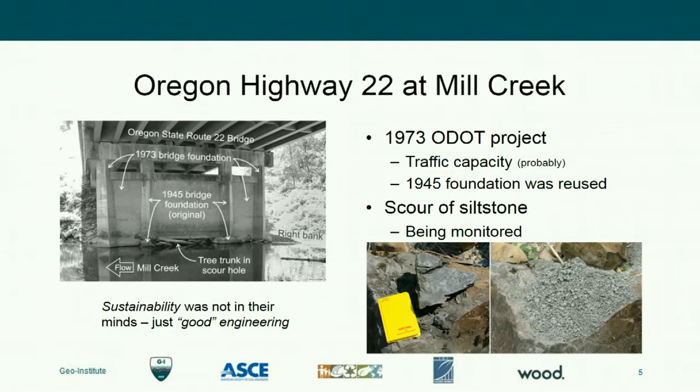So here's the checklist - very tiny words, I'm not going to comment on much of these things. Let me make a quick shift here on my own screen. So this is providing effective leadership and a decision to make something sustainable, even though it wasn't called that at the time it was done. Nonetheless, it definitely falls under that category in the ENVISION rating system.

Mexico City has a very interesting geologic condition that results in consolidation of soft clays as groundwater resources lower the groundwater level, and that is a problem. The soft clays create a problem not only for building support, which requires piles as a common foundation type, but the groundwater decline is causing subsidence. The problem with a combination of groundwater-induced subsidence and pile-founded buildings is the potential for the ground level of the building to become elevated relative to the ground, which creates all kinds of challenges for utility connections and entries.

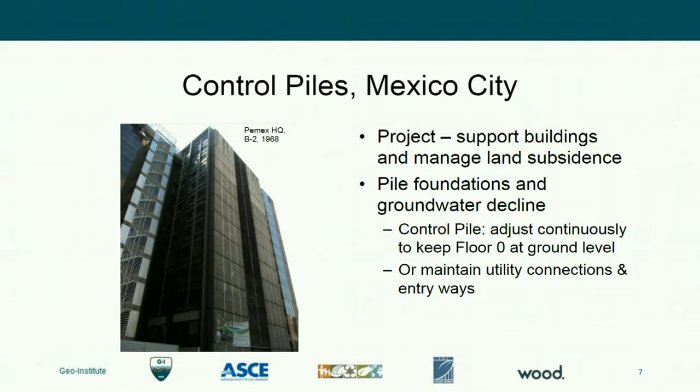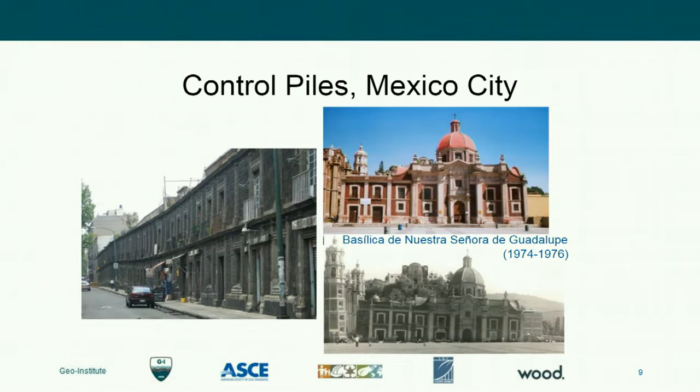So here's a building on the left, apartments it looks like, maybe retail at the bottom, and the Basilica de Nuestra Senora de Guadalupe on the right. That was constructed 1974 to 1976, a very heavy building with shallow foundations. You can see the subsidence, which was corrected, and I'm not sure how it was done, but maybe Hayward Baker, one of our sponsors, may have been involved in correcting that problem. So you can see the challenges.

Unfortunately, this confined space was not treated exactly the way it needed to be, and a conflagration occurred because somebody struck a match to light a cigarette. That's the reason I'm able to get the photo that I was, because of that damage to the building, which is very sad. In fact, it had some fatalities.

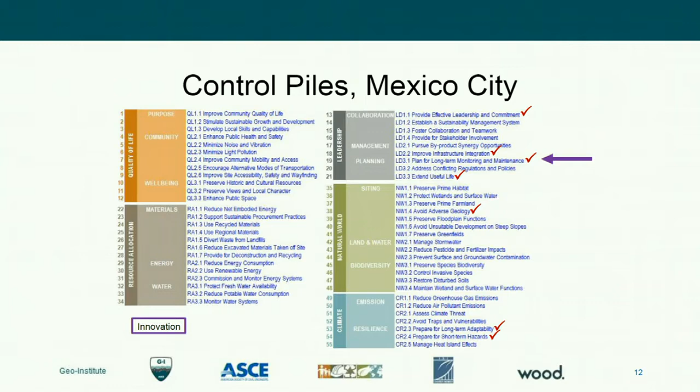But the idea that a crew had a continuous task to adjust these piles to keep the ground level of the building at the ground surface. So the control pile then, what I've picked out here is a plan for long-term monitoring and maintenance that's built in to allow the structure to exist in the geologic setting they had to deal with at that location.

Okay, so we'll change gears and look at a few other smaller projects that have some complexities to them.

What that meant was that rock bolts, face plates and shotcrete were not allowed to be used because of the impact they would have on the visual appearance. The slope could not be laid back, and I'm not sure if that was entirely to preserve the appearance or in part because of right-of-way, which is certainly a potential problem.

So Schnabel Engineering was the lead engineer on this, and they proposed, tested, and were able to successfully use polyurethane grout with drain holes, because that's impervious. The polyurethane was essentially a cement that glued the rock blocks together. They had to have the drain holes so they wouldn't have hydrostatic pressure behind it. That was a very useful approach - in fact, unique, the first attempt to make that happen.

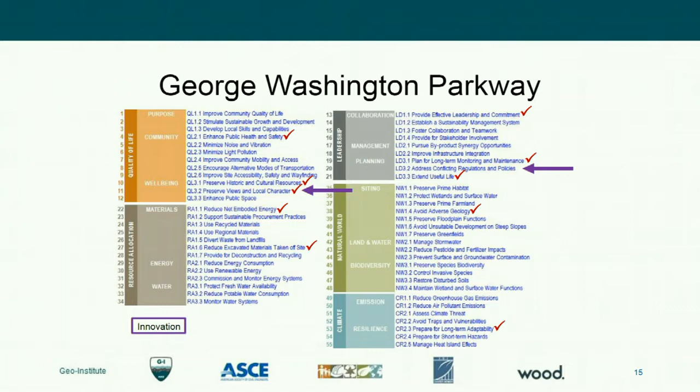The one I've picked here is to address conflicting regulations and policies - the policy to maintain the visual appearance while stabilizing something that was a safety hazard.

The next one here is a fault investigation at a school site in Los Angeles. The project was to locate the traces. The school site had been in existence for many years before the fault hazard was recognized, in a dense urban setting with lots of buried utilities.

Trench exposures is the preferred way of evaluating these fault traces, but in the dense urban area that's not possible in many cases, so we were using closely spaced hollow stem auger borings and some geophysics. The hollow stem augers use no water for mixing mud - it's not needed for that technology. It generates no liquid waste other than the groundwater after that's been encountered, and it has a large diameter barrel, which gives us a good view of the geology in the subsurface.

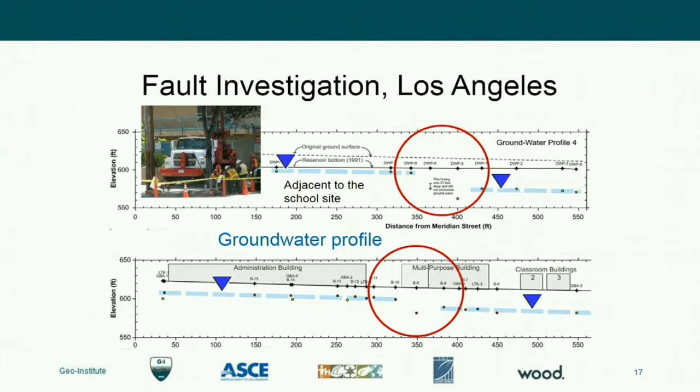So here you see a diagram where the groundwater was detected, and faults in many settings generate or create groundwater barriers, which is a clue as to where they are. We used that along with the stratigraphy, which you can see here, and identified where the fault traces were relative to the buildings on the site.

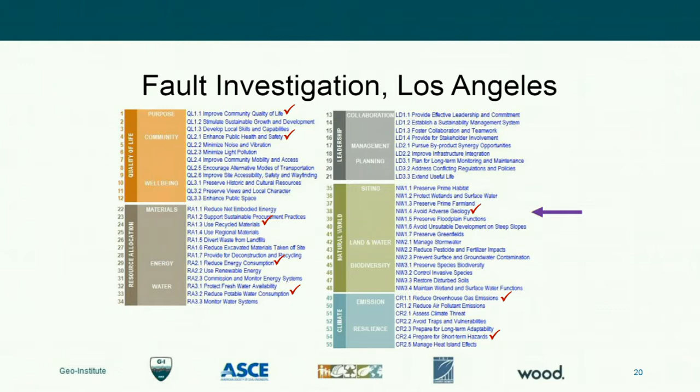And there's some geophysics. In view of time, we used seismic refraction from the ground surface and supplemented it with boreholes. We also had a trench where that was possible. So for this one, we'll pick avoid adverse geology, and of course we weren't avoiding it, but we were recognizing it and factoring it into the civil engineering project.

Lower Mount Wilson Road is a private road. It was originally built in the 1800s to provide access to some timber resources at what turns out to be the head of a very large landslide. A resort hotel was built there in the 1800s. It burned down, as many historic buildings of that era were prone to do. It was taken over by the county of Los Angeles, and the area up there was very well suited to be a lookout location for fire hazard management.

So the road was used by hikers, but the only vehicles that went on that road were LA County vehicles, so very low traffic. Average daily traffic was like 4 vehicles. It was maintained by the fire crews with their own equipment.

A major storm occurred in 2005 that created a couple of locations where the fire department crews were not able to do their normal maintenance to keep the road open, basically a single lane unsurfaced road. I have a note here that a fiber optics line runs along this road all the way up to Mount Wilson, which is hugely important for communication, from the community of Pasadena up to Mount Wilson, or maybe down from Mount Wilson.

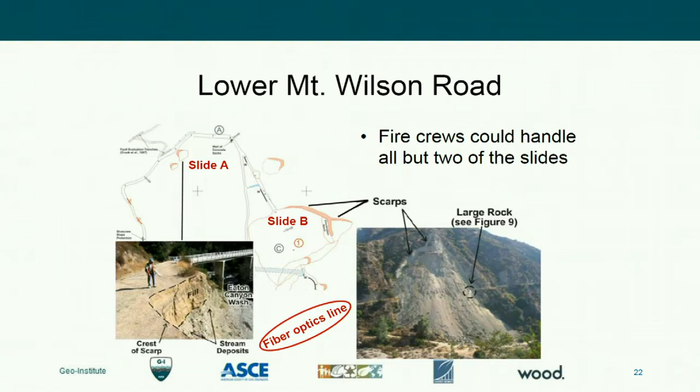So we decided to do a fix of the road, restore vehicle passage, and we did that with a combination of gabion baskets, which you see here at the same site, with a welded wire steep slope system above it. And on the major landslide right here, we had a welded wire wall with some gabion baskets above that wall to hold the toe from raveling.

Some very interesting things about this would take a long time to describe, but this was an innovation of using baskets between a natural rock outcrop and a huge boulder that was part of the slide, probably there before the road was established originally.

But this was a county project, and if this had been a public works project, we would have had to have factors of safety and those sorts of things. I rationalized and proposed that we disregard the stability, because this was a private road, one lane, unsurfaced, used only by the fire department, and reestablishing road access would be easy or possible to do. It wasn't exactly easy, but it was straightforward. If we needed to do an investigation for a stability analysis to get a permit like a normal highway would require, this road would have been abandoned because of the cost of the investigation, let alone the stability analysis itself, which probably was not possible.

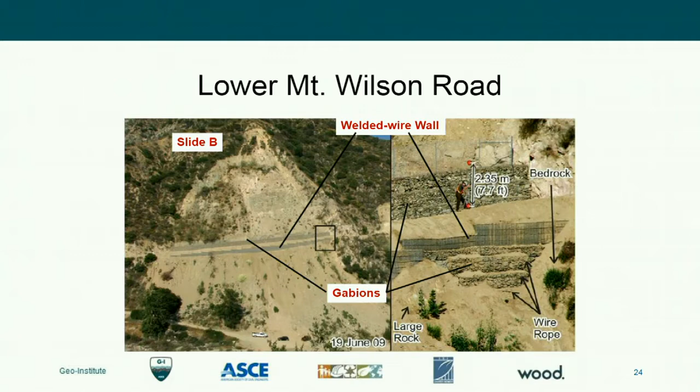So this is conflicting regulations again, as we mentioned before, to address those conflicting regulations, and many other things too. There's a paper in the ICE, the British Engineering Sustainability Journal, about this.

In Western Australia, the town of Perth has a building that was originally constructed in 2005, eight stories on a mat foundation, and there was a hole for a future building that had just been left in that shape. New owners bought the 2005 building, and in 2008 wanted to raise the height, creating a tower, which needed deep foundations.

Now, this has won several awards. It's called the Condor Tower. If you're interested, you should be able to find this information online, which is where I got this.

So here on the left you see the original Oakleigh building, mat foundation, 8 stories, and then the 2008 Condor Tower, where the tower part needed pile foundations. Those piles were installed through the frame of the existing building. They did no demo of the structure, well, they demoed walls, but they did not demo the structure.

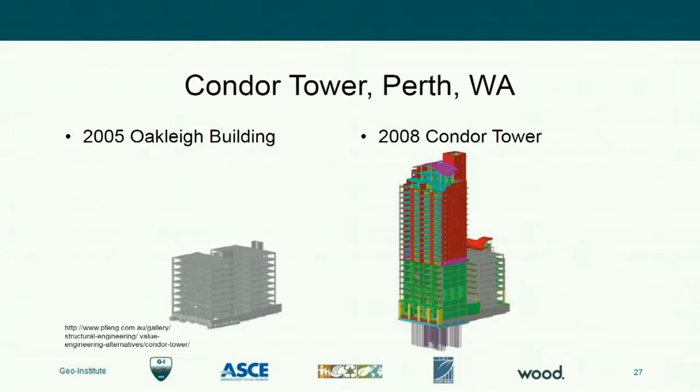So that was really quite interesting, and that's certainly leadership and commitment to be able to do that. There's lots of engineering to make that happen, but the idea that it could happen, I thought, was really excellent for geotechnical sustainability.

And then I've got a series of slides here. This is Cape Hatteras Lighthouse, which was actually moved about 2,900 feet because of erosion related in part to sea level rise, no doubt about it, but also wearing away of the beach, maybe even without appreciable sea level rise just because of large storms.

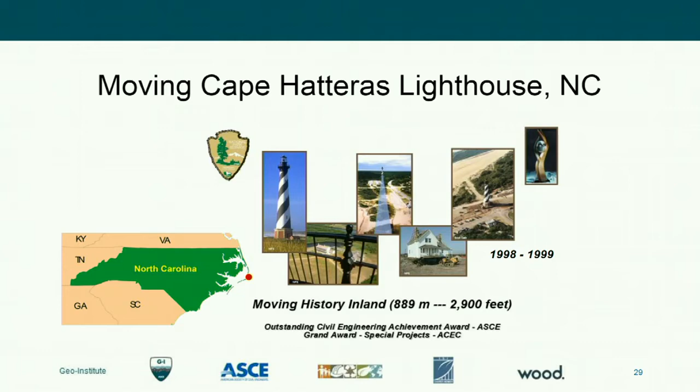What was done to move it had a geotechnical component. It also had a non-geotechnical component in terms of the jacks to keep it level, and rollers to allow it to be pushed hydraulically, in a stepwise manner, very much like some ancient Roman type constructions. The lower part was a steel mat, with evaluation of the foundation conditions in beach sand and near shore deposits.

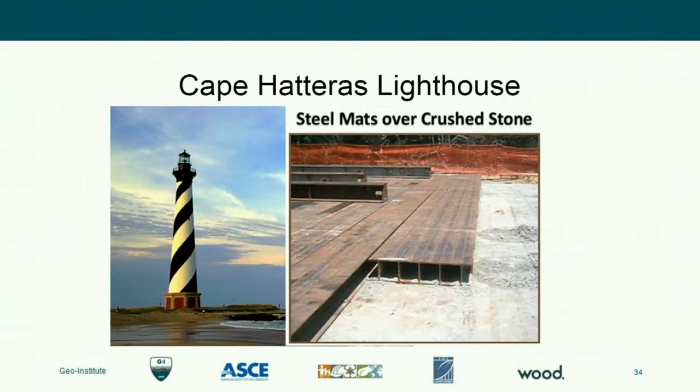So down below, you see what that looks like. Here's the steel mat with the guides. It went about 2,900 feet, or 889 meters.

A series of investigation holes were done in part by Law Engineering, that became MACTEC, and then subsequently AMEC, and now a wood company. Soil borings were also made by the Army Corps of Engineers, who were overseeing this. So this was quite an undertaking, very high risk, high profile.

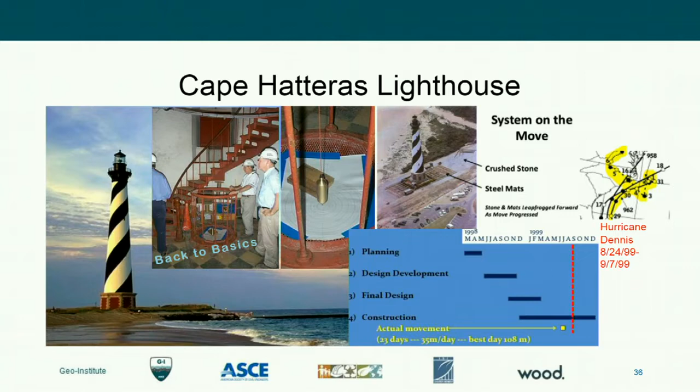Here's a pendulum with a circular target, because the tilting of this rigid, brittle structure was really critical. And while it happened, a hurricane occurred. Hurricane Dennis moved across the site, and that's the yellow track there, with the black track with yellow highlight showing the hurricane path. From 1999, there were a number of hurricanes. That one happened during construction, where the red vertical line is.

So this has a number of really interesting things, but again, I picked the leadership and commitment one to highlight here.

And now the use of underground space. This is in Lalibela, Ethiopia, up approximately in the area of Amhara. I visited this area for a water supply project, but not Lalibela itself. That was a tourist attraction that I visited.

King Lalibela wanted to create some churches that would serve as a monastery, for well, I'll just leave it at that. I won't go into more of the history, although it's kind of rich. But this was done in the 12th century.

The problem or condition here was that durable stones and timber for typical construction were not available here. So the geologic environment included a volcanic conglomerate, called agglomerate, that was soft enough to be excavated with hand tools, but strong enough to stand vertically.

So a series of churches, this is the Church of St. George, which is cruciform in plan view, and one of the most iconic of the 11 churches here. It's 3 stories high, and the rooms were created by hollowing out the earth material, the rock, to create those rooms. It's really fascinating and very impressive.

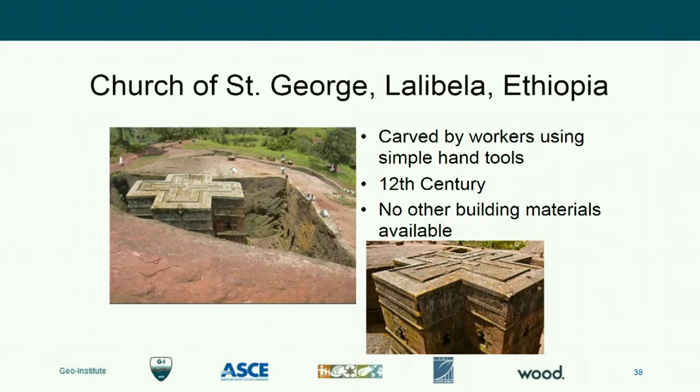So here, what did I pick? Conflicting regulations and policies. I don't know why I picked that one, so I will just skip that. Probably in the wrong place.

Extend the useful life, because it's been in operation since the 12th century.

And finally here, the idea that purple is the new green, because recycled water, at least here in Southern California, is designated to be in purple colored pipes and facilities.

So the point here is that this is suitable water to use for drilling fluid makeup for sure, lab testing perhaps if we want to use water for concrete mix, if that's going to be suitable, or soil conditioning for compaction, or dust control.

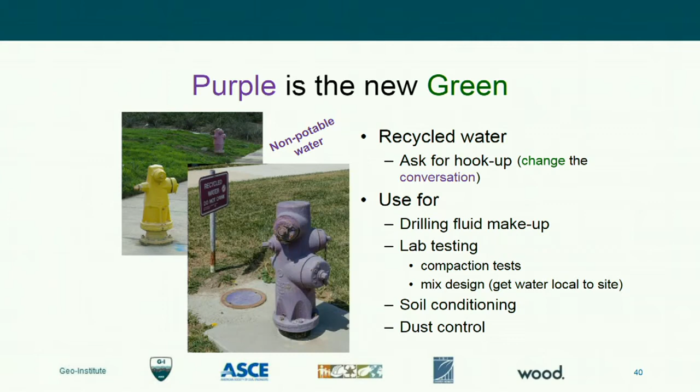So I would encourage us all to ask for hookups with recycled water on our projects. If they're available, that's wonderful. If they're not available, simply asking for it will raise the profile of awareness on the people that need to know about that, or we would like to know about that. And that's leadership. There's many other things, but lots of leadership opportunities here.

So I think I've used up the allotted time, and let me go to Q&A and see if there's anything in there.

One of the topics that is real common, and I mentioned this in the first example, the bridge in Oregon, is that much of what is called sustainability, certainly in geotechnical, is what we would consider to be just good engineering, balancing cut and fills and that sort of thing.

So what's wrong with just calling things good engineering and having sustainability be part of it? And that's a good concept, and it ought to be happening. But I think the issue we ought to consider is that we have a word, sustainability, that means so many different things to different people that it would be really helpful for it to be connected to us.

And civil engineers, most if not all of the people on this webinar will recognize, have a triple bottom line philosophy of the economy, the environment, and society.

One of the reasons we wanted to do it in California was San Diego, which worked out well since the annual temperature is roughly 65 degrees Fahrenheit. It doesn't change that much, so at least we had that as a baseline. It rains roughly 12 inches in a year in San Diego.

So 3 main objectives from this work: definitely understand some of the in-situ thermal properties. There's been a lot of literature published, so we just wanted to verify if we were going to get the same data. Then understand what is the potential for heat extraction at a municipal landfill, and also start putting a framework together to understand if, based on the heat extraction potential, we could predict what kind of heat you can get and for how much duration.

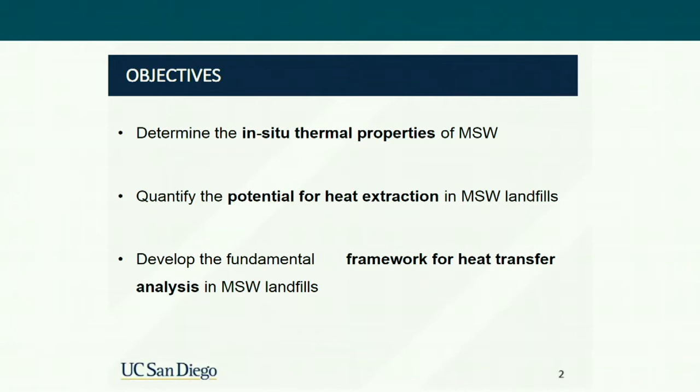Just a quick summary of what the landfill liner system looked like. Our heat exchange pipes were sitting on top of a protective cover, generally select waste, about 2 feet thick, which sits on top of a 1-foot drainage layer. The liner system consisted of a geomembrane, a geosynthetic clay liner, and another geomembrane at the very bottom.

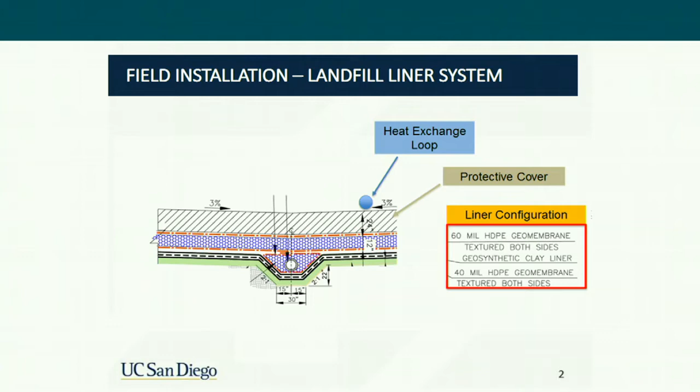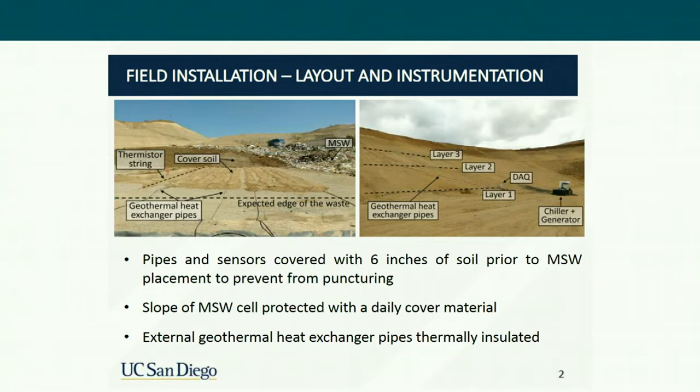So that's just giving you a close-up look of the same. You have layer 1 of geothermal pipes sitting right at the bottom of the liner system, layer 2 at 20 feet high, and layer 3 at 40 feet high. Then you see the black wires, which are your geothermal pipes coming out of the landfill.

Just an instrumentation layout in terms of cross-section. Again, the same picture, but you see another 120 feet of pipe. We have 4 sensors: blue is closest to the edge, then green, yellow, and a dark green shade. So roughly 12 sensors, 4 per layer.

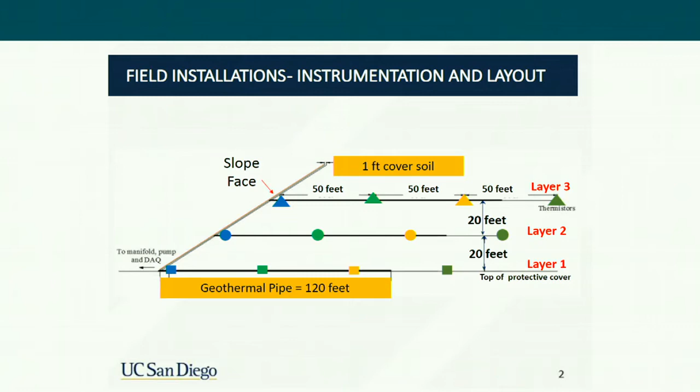The idea was you would be circulating water, running it through a chiller, so basically it sends it to like 50 degrees Fahrenheit, pushes it through the loop. Once it goes through the loop and comes out on the other end, you'll see how the water temperature changes once it's made its way through the pipe.

So we divided this project into 2 stages. The first stage was just to understand how long it takes for temperature to stabilize within the landfill. We put these pipes and temperature sensors in and monitored temperature within the landfill for a year. Roughly at 13 months is when we saw the temperature stabilize, with no further increase in temperature within the landfill.

In the second stage, once the temperature was stabilized and we understood there was no more change, we implemented our heat extraction system, wherein we pushed cold water at one side of the loop and measured it coming out on the other side. We ran this experiment for 17 days, and our target temperature was 12 degrees centigrade, or 50 degrees Fahrenheit plus or minus.

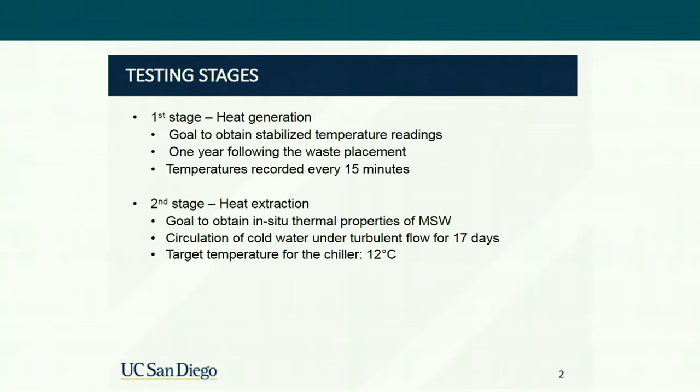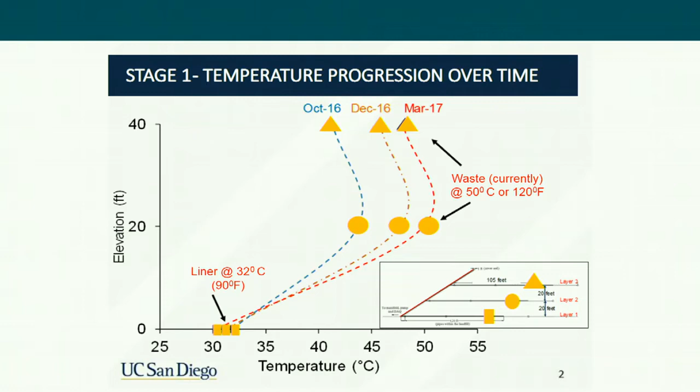In the second phase, once we established there was a stable temperature within the landfill, this graph shows on the left temperature, and on the right side the volumetric flow of water. The gray line corresponds to the volumetric flow, which is where we try to push a constant amount of water within layer 2. On the bottom we have time in hours, where 400 corresponds to roughly 17 days.

The blue line shows the water going in at 20 degrees Celsius, and the water coming out, shown in orange, is 35 degrees Celsius, plus or minus. Based on that, Leticia in her dissertation has talked about the line analysis and heat analysis, and has come up with the waste characteristics, the thermal properties of the waste, about 1.3 watts per meter centigrade.

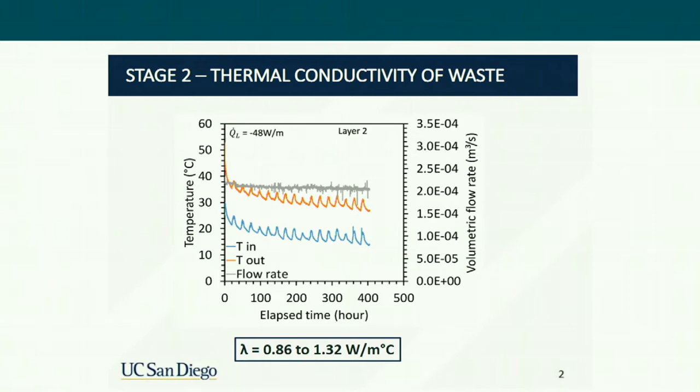In summary, at this very early stage of the project, we were able to install a geothermal heat exchanger system within a municipal solid waste landfill. We roughly saw 50 degrees Celsius in less than a year, which showed us there was potential to extract heat. Based on this preliminary data analysis, we see the average in-situ thermal conductivity is roughly 1 watt per meter centigrade.

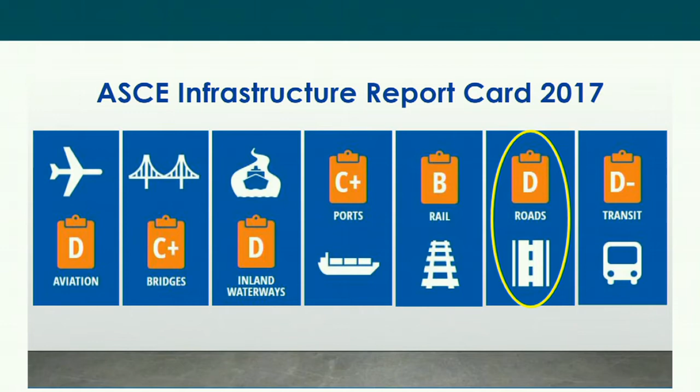As you know, pavement infrastructure is an important component of the built environment. They connect supply chains, enable trades and businesses, provide access to healthcare and education. There are several challenges such as industrialization, aging, natural hazards, etc., affecting the pavement industry.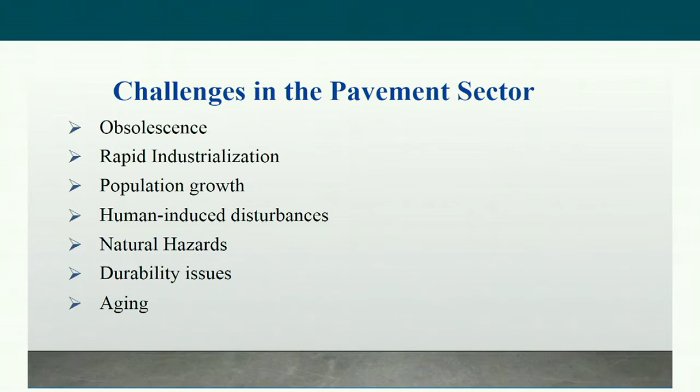One of the earliest definitions of sustainability was given by the Brundtland Commission. What this definition essentially means is development that is sustainable in the long run, and by the way, we can use the terms sustainability and sustainable development interchangeably.

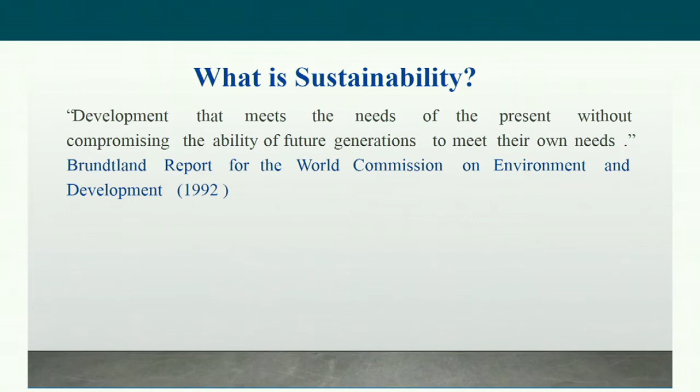Sustainability is maintaining equilibrium among the environment, economy, and society. Sorry, there's an issue with one of the animations. In September 2015, I believe, the member nations of the United Nations adopted these

17 Sustainable Development Goals, which should be achieved by each nation by the year 2030. Please note Goal 11, which focuses on sustainable and resilient infrastructure.

Researchers suggest that the scope of sustainability is highest at the beginning or planning stages and decreases drastically as the project moves toward the implementation stage. Therefore, it is necessary to incorporate principles or best practices concerning sustainability and resilience at the initial stages or at the conception of a project.

Now let's talk a bit about resilience. The conceptual definition states resilience is the ability of communities to withstand shocks or perturbations to their infrastructure and to recover from those effects.

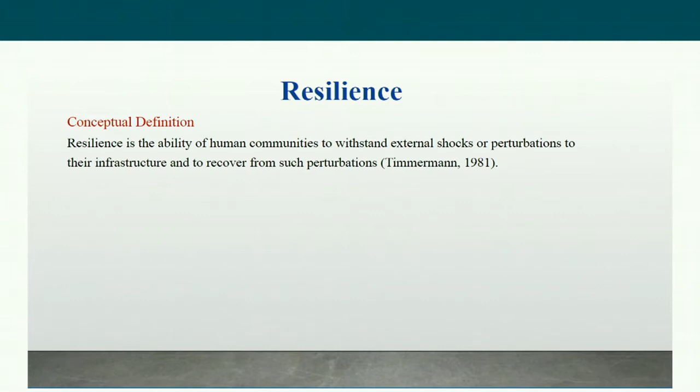Resilience is characterized by four properties - and I apologize, the font in this figure is a bit skewed. The four properties are robustness, or the capacity to withstand a certain level of stress without functional damage; redundancy, or the extent to which an infrastructure component is substitutable in the event of damage; resourcefulness, or the ability to identify disruptions and set up mechanisms to address the same; and rapidity, with which external disturbances are addressed and the losses are contained.

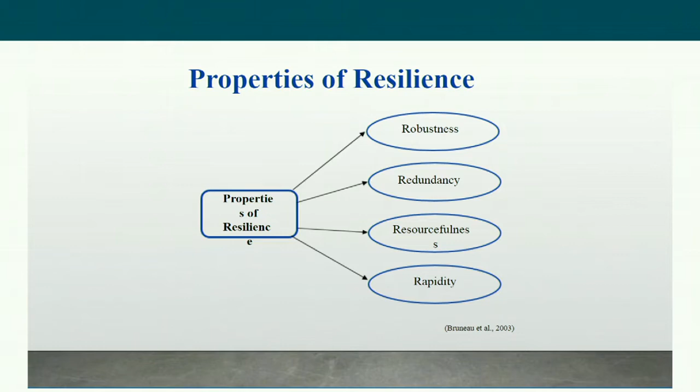To summarize, a combined consideration of resilience and sustainability is indicative of the quality of an infrastructure.

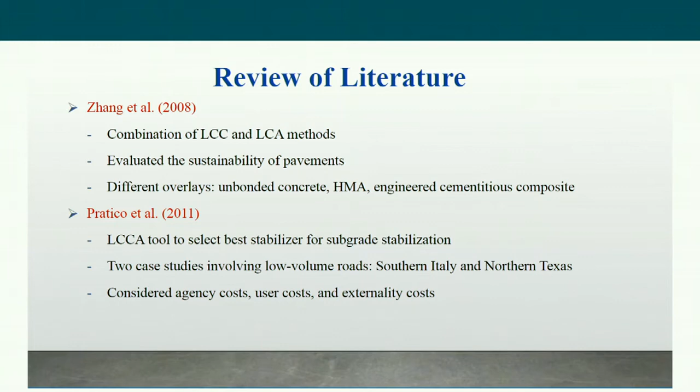The next few slides list out some past studies on sustainability in pavement infrastructure. We're not going to go through them in detail due to time constraints, so let me skip a couple of slides.

Now, most of the past studies highlight sustainability, but they do not adopt a combined or unified approach linking sustainability with resilience, and that is something we tried to attempt through this framework.

There were three major objectives: one, identification of metrics for sustainability and resilience; two, development of a quantitative framework; and three, defining the quality of infrastructure, taking into account both aspects of sustainability and resilience.

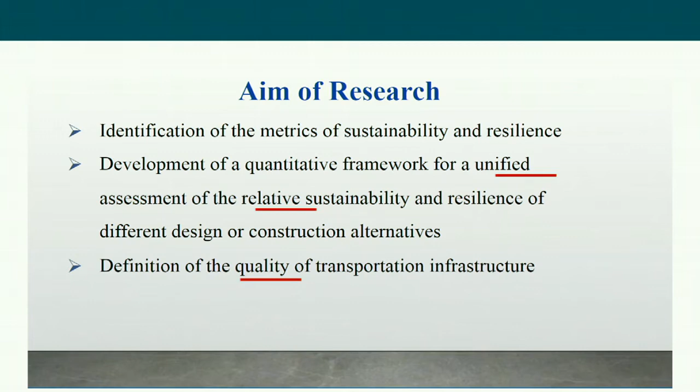Please note that the framework I'm about to introduce does not provide an absolute value for sustainability or resilience. It merely facilitates comparison or assessment of the relative sustainability and resilience of different competing alternatives.

So when I say alternatives, for a particular project, whether you want to use piles or drilled shafts, or a segmental MSE wall, a Gabion wall versus a gravity wall or a CIP wall. So when you have a bunch of alternatives, we can use this framework to gauge or assess the sustainability and resilience of these different competing alternatives to come up with a suitable choice.

Now let's dive into the framework conception. This flowchart explains the framework a bit more clearly. This approach is simple. It involves normalization and weighting - weighting as in attaching weights to the different impact categories based on their relative importance. We'll have an extensive discussion on the weights later on.

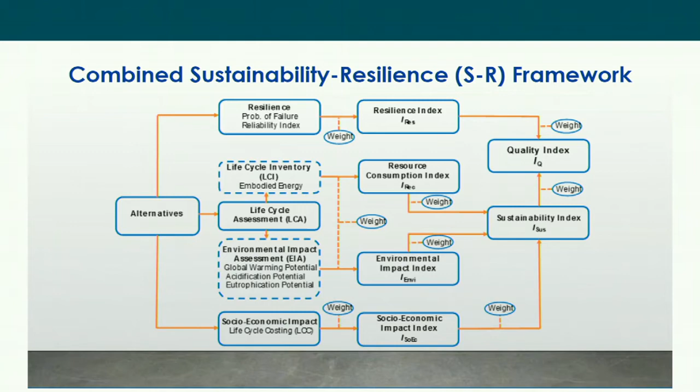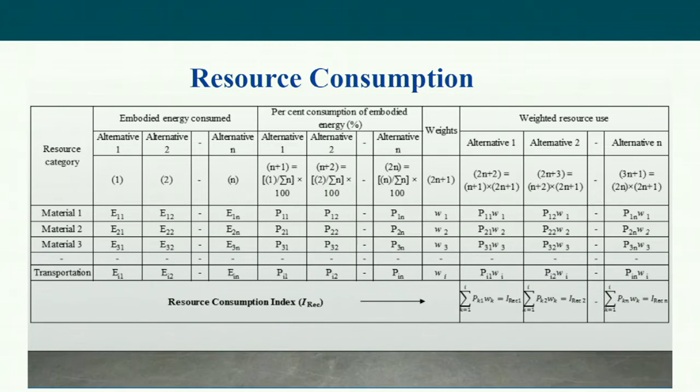So these are just the different metrics we talked about earlier. The life cycle inventory is performed based on the embodied energy. Let me just show you one of these. It's difficult, for time constraints, to go through all these tables, but let me just show you one quick table of how we come up with a calculation.

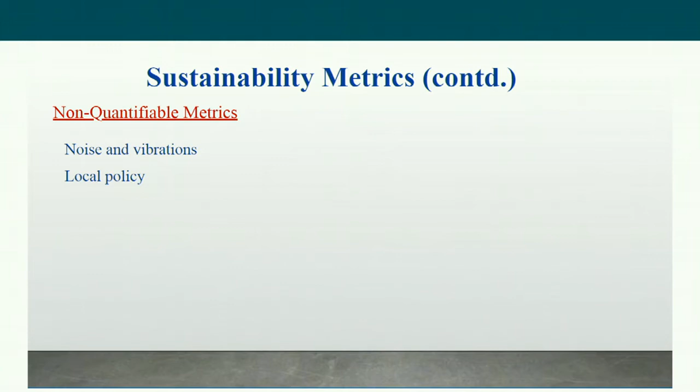Then we attach the weights, and finally we have our weighted impacts to give the environmental impact index, which is basically the summation of all the weighted impacts. So that's how the framework is developed. And the final aim or goal of the framework is to enable a visualization or a graphical tool.

So let me skip to - so at the end, we'll have something which looks like this. This is a radar chart representation. All these results, as you can see, have been internally normalized.

The beauty of this approach is that you can have any number of metrics for comparison purposes. In this polygon, we'll just add more nodes the more metrics you have.

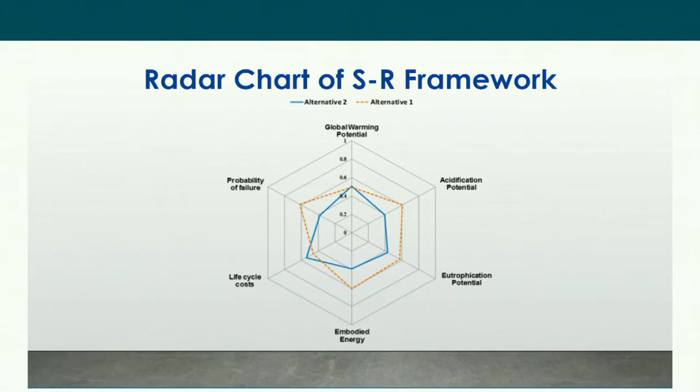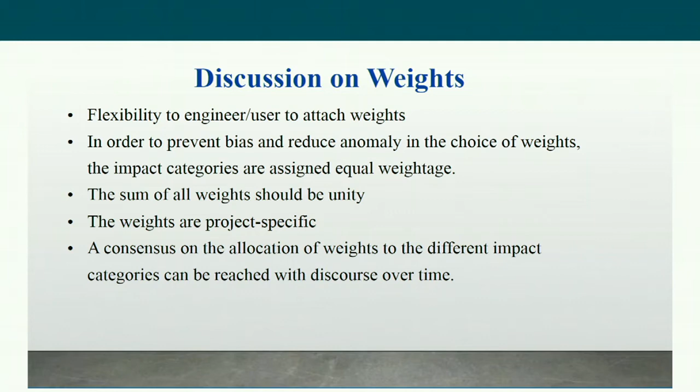Let me talk about the case study a bit. This is a subgrade stabilization project that we had, a research study supported by the Texas Department of Transportation, TxDOT, in Fannin County, Texas.

At the bottom right inset, you can see the test section. The annual average daily traffic on this highway was around 8,000, so this could be classified as a high volume road. The soils at the site are expansive clays that possess a high sulfate content.

Sulfate-induced heave was an issue, and we tried several combinations of lime and fly ash to stabilize the subgrade soils. Based on the lab studies, we decided to use 6% lime, and then we also decided to add some fly ash to limit the available calcium for ettringite formation so that we do not have sulfate-induced heave.

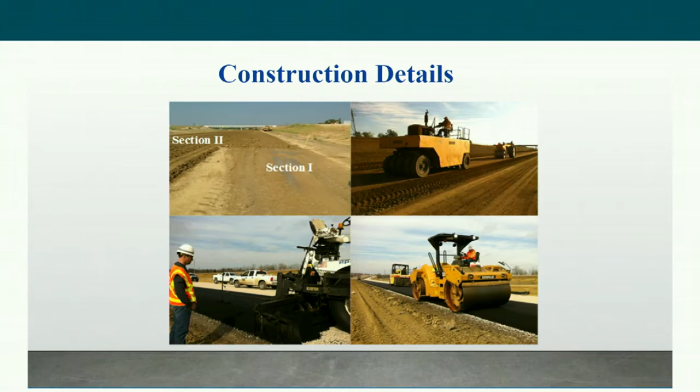So we came up with two test sections. Section 1 had 6% lime and 3% fly ash. Section 2 had 6% lime. This is the construction details. Both these sections included 7 days of mellowing, and both were also monitored continuously for a period of 2 years.

These are some of the assumptions for this case study. We had the section dimensions, we calculated the mass of the soil that was to be treated, the mass of the material. We assumed the mileage of the dump truck and the capacity, and the average distance. So we need these data in order to perform the assessment.

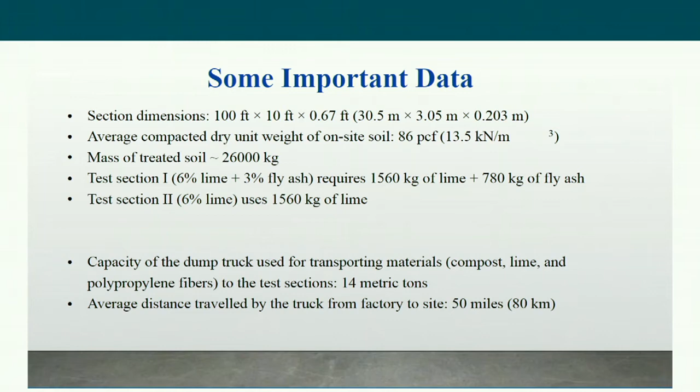The next few tables are just the assessment framework, I already showed these. Let me just finally show you the result.

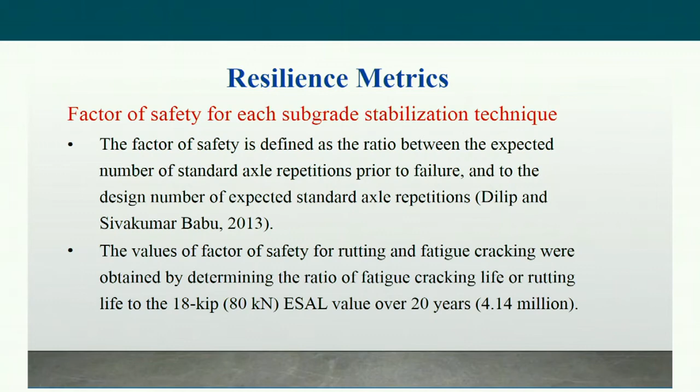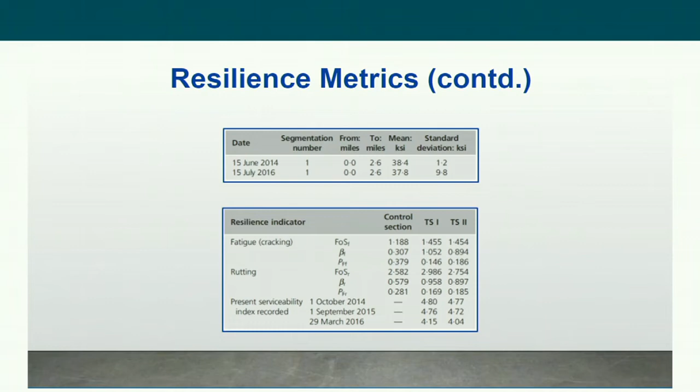For resilience, I think I just touched upon it a bit earlier. We used the probability of fatigue cracking and probability of rutting failure, and we also combined them with field readings. We had the readings for the modulus which we had from a portable falling weight deflectometer test, and we also recorded the present serviceability indices. Based on that, we found our resilience index.

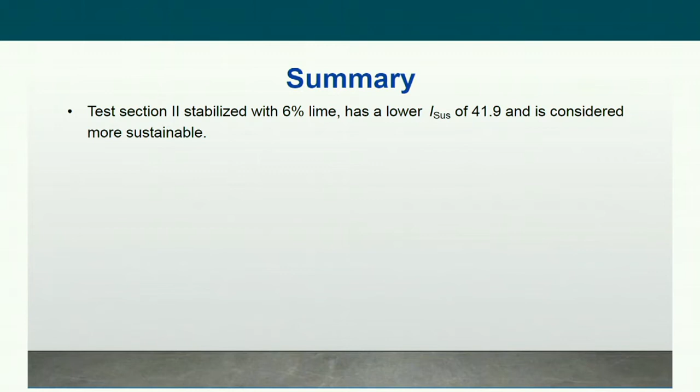In conclusion, as I mentioned, the framework facilitates a unified assessment of sustainability and resilience.

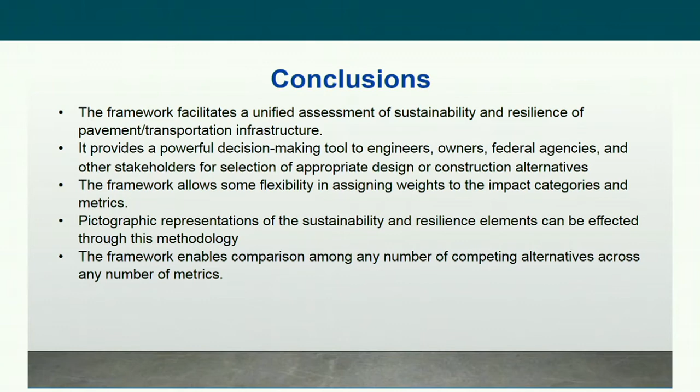It provides powerful decision-making tools to engineers and other stakeholders for selection of appropriate alternatives. It allows some flexibility in assigning weights to the impact categories and metrics. And finally, and more importantly, we have a pictographic representation of all the elements, so it enables comparison among any number of competing alternatives, among any number of metrics.

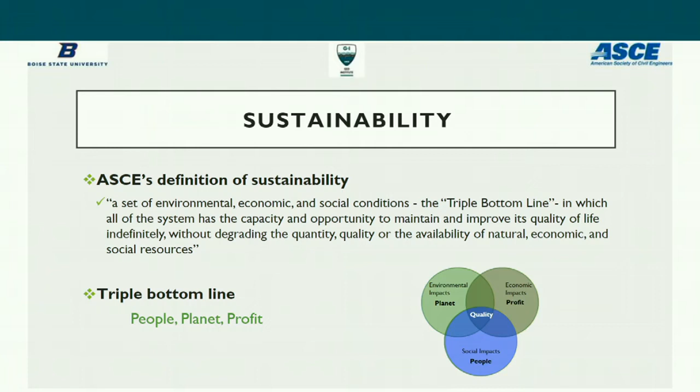So sustainability is triple bottom line: people, planet, profit. That's what we all have agreed upon. And then resiliency is primarily defined from these 4 R's: the robustness, resourcefulness, rapidity, and redundancy.

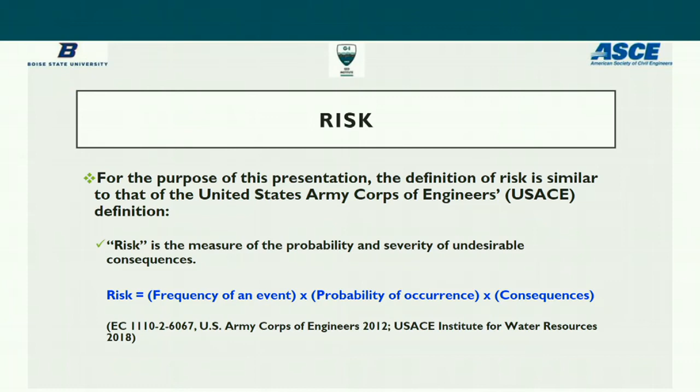And then the risk is, we are defining the risk as per the Army Corps of Engineers definition, which is risk is a measure of the probability and the severity of undesirable consequences. So risk is not only just the probability of occurrence, but what is the consequence of that, and what is the frequency of the event. So all these three make it a high risk situation or a low risk situation. We account for all these three when we talk about risk in our analysis.

So what should this framework look like? A good framework would measure sustainability and resiliency of its infrastructure while accounting for risk as well. And then the framework should be adaptive for various types of inputs or parameters that need to be accounted for.

for that particular infrastructure. Sometimes the analysis has to be very deep, accounting for every possible parameter. Sometimes the analysis needs to be very superficial because the decision makers are not really too much into the depth of these assessments. So the framework should be able to accommodate both the depth versus the breadth of these parameters.

And then some way to plot this or visualize the sustainability and resiliency indices in such a way that it's easier for the decision makers to see and understand where one alternative is falling compared to the others.

And then, our goal is basically to make it simple yet robust so that it is usable by practitioners. If it is too complicated, practitioners probably will have resistance to using it. But at the same time, if it is too simple and not robust enough to predict the sustainability and resiliency index accurately, again, nobody's really going to use it. So our goal is to be cognizant of both these aspects of the framework.

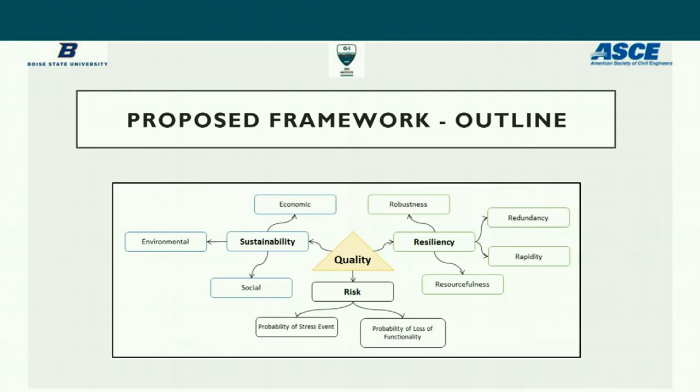So we are trying to account for all three of these and come up with index values that can be plotted, so we can see how the infrastructure is faring—whether it's high sustainable and low resilient, or the other way around, or good in both sustainability and resilience.

So the next few slides I'm going to quickly show how the framework steps work, and then follow that up with an example for an earthen dam. The basic steps for the framework are to first choose the system of analysis, whatever system you would like to analyze.

Then do a sustainability analysis with the triple bottom line as the basis—accounting for the economy, environment, and societal impacts for that infrastructure due to its construction. Then we report that sustainability in terms of a dollar per year amount, because we are looking at it from a life cycle cost analysis point of view.

Our idea is to account for each of these—sustainability and resiliency—especially when it comes to sustainability's societal, economic, and environmental impacts. If measured in metrics other than dollar amount, it's sometimes hard to visualize their impact. So we try to convert everything into a dollar per year amount so we can relate to them more quickly than, say, carbon emissions versus some metric for societal impact. So after doing the sustainability analysis, we report the results as a dollar per year figure.

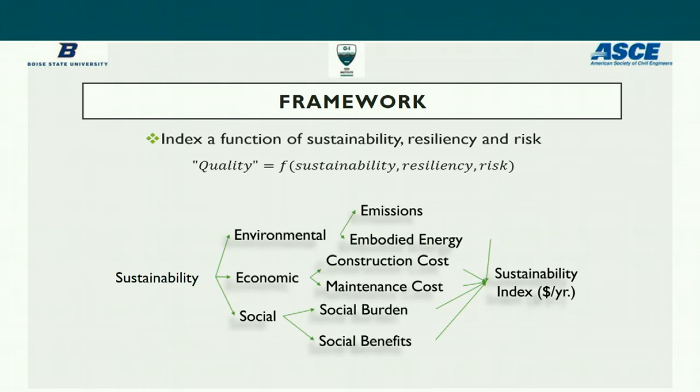And all of these will be combined into a dollar per year amount, and that's what we are assigning as the sustainability index.

And then for the resiliency, we start with the probabilistic hazard analysis. So what are the possible hazards that this infrastructure can be subjected to? And due to that, the first thing that will be assessed is the robustness. How robust is it under that hazard? And once the robustness is assessed, the change in functionality can be assigned based on how robust the system is.

Based on that, we can have a robustness index, and then we have to talk about the rehabilitation efforts. The rehabilitation efforts are the ones that will lead to the resourcefulness, rapidity, redundancy, and the hazard-related sustainability. Resourcefulness is how effective, how close are the materials that we need. It can be talked about in terms of the materials point of view, the budget point of view, and various aspects of being resourceful.

Rapidity, as the name indicates, is how fast we can get the infrastructure back in place. Redundancy is whether there is any alternative infrastructure to replace this as a short-term alternative or not. And then hazard-related sustainability is what it would take to make this infrastructure back to its full functionality, or some portion of its functionality.

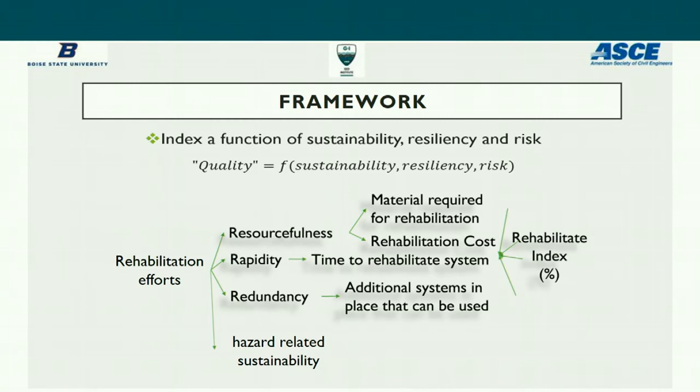So all this resourcefulness is material required for rehabilitation costs. Rapidity is the time to rehabilitate, and additional systems in place can be used for redundancy. All these will give us a rehabilitate index, and then the hazard-related sustainability has been normalized to the original sustainability numbers that we first did in the first step, and they yield a scaled R value, which results in some of the resiliency aspect of the index.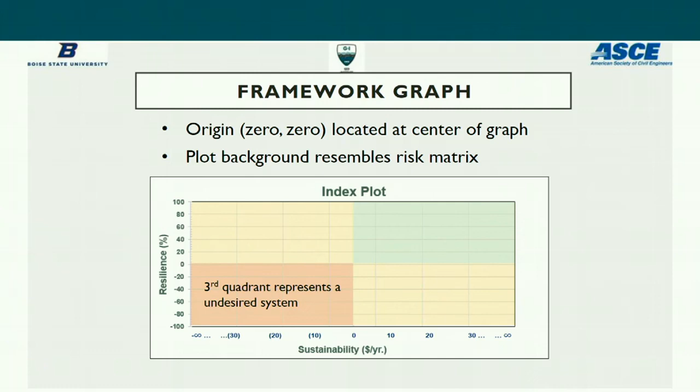If it falls under any of these two, second or fourth quadrant, the ones in yellow, they are quadrants that represent some caution. They are either very good in resilience or very high in sustainability. And then we have the third quadrant, which is the most undesirable of the three, which is not really a desired system at all. So we need to be able to plot our infrastructure in one of these four quadrants.

Because this is a dam controlled by the Army Corps of Engineers, not all information is publicly available, so we had to make some assumptions about the internal geometry for this infrastructure. We also obtained historical data on the economic and societal impacts of the dam to account for how these triple bottom line aspects of sustainability can be assessed. I want to insist here that this is an example of how the framework can be used. There are things that we have considered and things that we have not considered during this analysis — I will point them out as we go along, but keep in mind this is a simplified example for using the framework.

So for the sustainability, the environmental impacts — we use the construction activities as the basis for the environmental impacts. So excavation is a part of it, transportation of the material, and compaction of the material. During construction, because this is an earthen dam, the process is fairly simple: we bring the material from the predetermined site, bring it on site, and then compact. So we used the time to complete the job and the fuel consumed for the energy and emission computations from Caterpillar Inc., because we assume those are the equipment that were used during its construction.

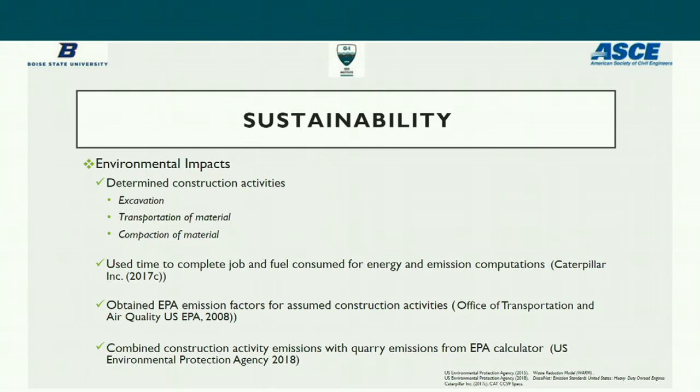We obtained the EPA emissions factors for the assumed construction activities from the Office of Transportation and Air Quality, US EPA, and then combined the construction activity emissions and the quarry emissions, because that's where the excavation is happening for the material that needs to be brought on site, from the EPA calculator, and used those values for the environmental impacts. For the economic impacts, it's fairly straightforward. We know the materials that are being brought, and we assume the cost for the construction from the historical records, and use the average annual maintenance budget as a supply value.

We used yearly maintenance fees based on literature from ASCE and the US Army Corps of Engineers, and distributed these costs as an annual worth over the design life of the dam. These are all assumptions made to show how the framework could be used. We also used the average annual inflation rate from the IRS to account for the time value of money as accurately as possible in the life cycle cost analysis.

For the social impacts, we looked at the land loss due to the filling of the reservoir, since whenever a dam is built, huge land needs to be purchased and is lost from previous owners. The other societal impact we looked at is the recreational usage of the reservoir and its facilities, since once the dam is built, a lot of recreational activities happen there.

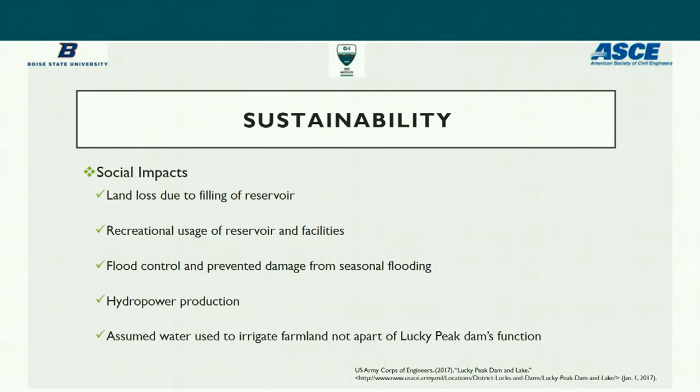So these are all the aspects considered while assessing the sustainability for this infrastructure. I'm not showing the tables that accompany these things like Dr. Das did, but just the final numbers we came up with.

The environmental impact turned out to be a negative value since it's a negative impact on the system. The economic impact is also negative since it's a cost being incurred. From the societal impact, there is certainly land that's lost, which is basically bought, but due to hydropower generation and assigning a life cost to the flood control aspect of this dam, it turns out to be a very positive impact overall, a very big positive number.

These are some additional numbers for the fuel burned during construction, the total embodied energy, and the carbon emissions during the construction of this dam. This number is combined and assigned as a sustainability index value, which I'll show in later slides.

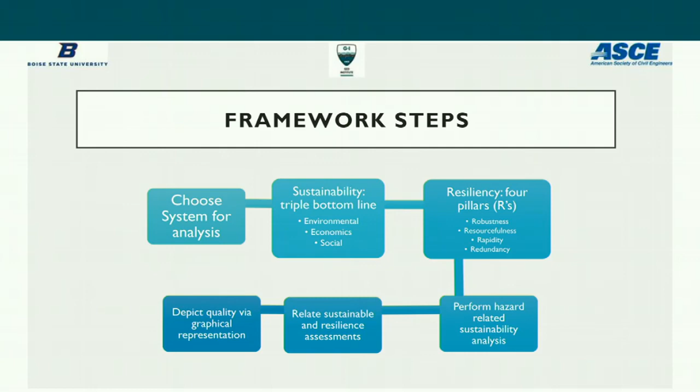The next step is the resiliency aspect. For the seismic hazard analysis, we primarily looked at the earthquake potential, although the earthquake potential in this area is fairly low. Again, we are just looking at an example, so we thought we'd look at the earthquake potential. We used various peak horizontal accelerations due to different intensity earthquakes and subjected this earthen dam to earthquake loading.

We used GeoStudio to model all this, and came up with analysis numbers that showed various functional losses for different intensities of these earthquakes.

For robustness, we used the probability of earthquake from USGS. For a magnitude of 5, what would be the probability? For a magnitude of 6, what is the probability? As intensity went up, the probability went down, since this is not a very high earthquake-prone area. So the total probability of failure comes from the change in factor of safety and the probability of the hazard.

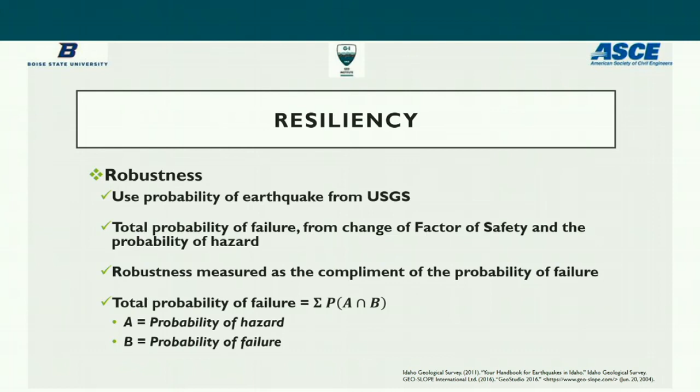We accounted for the combined effect of all these individual earthquakes that could cause functional loss by looking at total probability. Total probability of failure is the summation of the probabilities of A and B, where A is the probability of the hazard and B is the probability of failure given that hazard occurs. For example, an intensity of 4 or 3 may not really impact the dam, but an intensity of 6 or higher will certainly increase the probability of failure correspondingly. We accounted for all these aspects and came up with a total probability of failure value.

That total probability of failure value looks something like this: if the magnitude of earthquake is 5.5, the probability of occurrence of the earthquake is 0.263, which is a relatively higher number. But the probability of failure due to that is pretty much non-existent, so the factor of safety still remained above 1.

Then the magnitude of earthquake, if it is 6, the probability of earthquake occurrence is slightly lower, but the relative probability of failure is slightly higher, and so on and so forth. So we accounted for all this, and we used a total probability of failure of 0.054, and we assigned a robustness value of 0.946.

This basically tries to account for not only the impact of a very high intensity earthquake, but also the low intensity events and their corresponding probabilities. We assigned a robustness value of 0.946 for this particular dam. Once we've assessed the robustness, the resourcefulness aspect is assumed.

We assumed that the rehabilitation is to basically get the slope back to 100%. So we targeted 100% rehabilitation functionality of the dam, and assumed the material required for the replacement is the same as the critical slip surface of the failure.

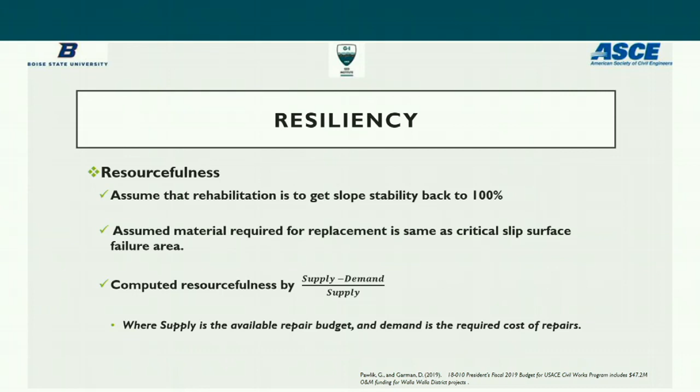But if it's the other way around, the resourcefulness is quite low. So that would pretty much assign a number for the resourcefulness aspect for this infrastructure. So these are some numbers trying to show how the resourcefulness numbers are changing based on the magnitude of this earthquake.

As the earthquake magnitude goes towards 7, that means the entire dam is under distress, so the cost to repair is quite high for that particular intensity.

Based on the impact and the available cost for the repair budget, the way we came up with this resource budget is we looked at the documents for who owns the dam and how much resource allocation is there for maintenance of this particular infrastructure.

Again, that's an assumption that we made, still coming from the Army Corps of Engineers, but again it's not accurate. If we had that accurate number we could directly use it, and this is how those numbers turned out to be.

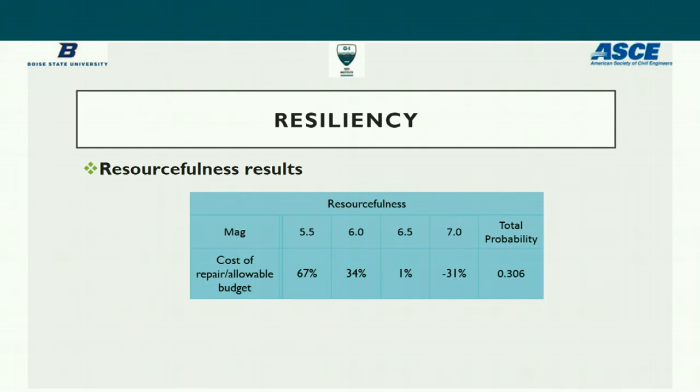As you can see, if the earthquake intensity is quite high, the resourcefulness index goes into the negative. So again, we used the same total probability application and came up with this resourcefulness number to be 0.306 for this infrastructure. The next one is the rapidity, how fast the system is going to bounce back.

In the interest of time, I'm going to skip through these. Again, we did the same analysis based on the time and duration of the rehabilitation impacts. We came up with the total probability for this rapidity aspect as 0.112.

And then once we have that, the last assessment we did was sustainability after the impact. Again, after the impact, we know the materials that are needed to make this kind of reconstruction.

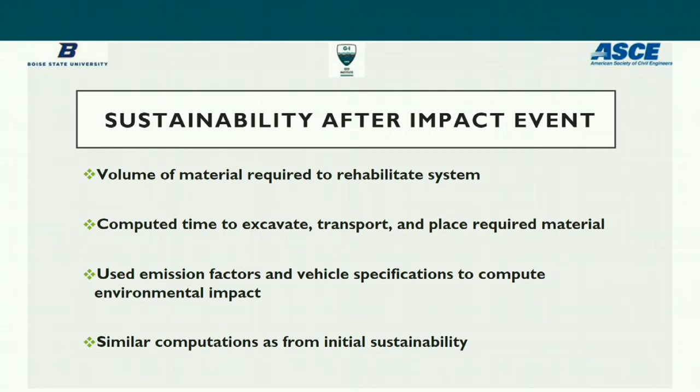That means there are reconstruction aspects, and the emissions that are going to come during this reconstruction are accounted for in this stage. Each one of these magnitudes are associated with the corresponding carbon emissions, embodied energy, and the fuel cost associated with these construction activities.

This hazard-related sustainability has been normalized with the original sustainability numbers that we had, and the total hazard-related sustainability result was 87.43% for this particular infrastructure.

And then the next step is to basically come up with these index numbers so that they can be plotted. The way we came up with the index numbers is all sustainability values are reported as dollars per year. Like I said in the beginning, we wanted to convert everything into dollars per year and use the fuel consumption as a means to determine the cost per emissions.

We used the U.S. Energy Information Administration numbers to convert the energy. So if we know the carbon emissions, we can convert that to an equivalent fuel consumption using these numbers reported by the Energy Information Administration. And that's how we came up with this dollars per year for the sustainability aspect.

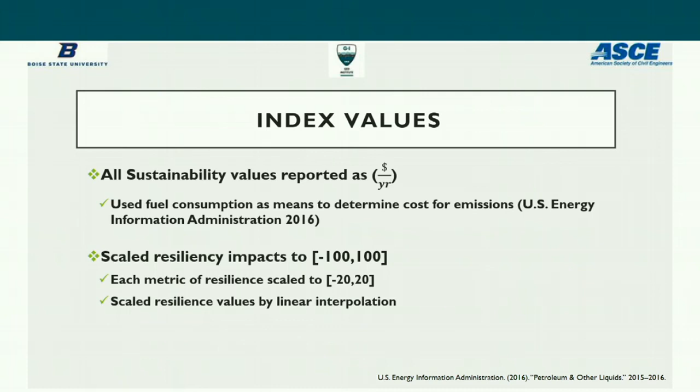And for resiliency, we basically scaled it from -100 to +100, where each metric for the resiliency is scaled between -20 and 20. So we basically gave equal weightage for each aspect of the resiliency. So 20, 20, 20, all of them add up to 100. And these scaled resiliency values are obtained by linear interpolation between these 20s.

Then using these numbers, we came up with these values. So we normalized these costs, and we came up with a sustainability index as a summation of all the sustainability related costs, which turned out to be 41 million. And the resiliency index value, a summation of all the R's, can range from -100 to +100, and this happened to be somewhere around 50, 49.9.

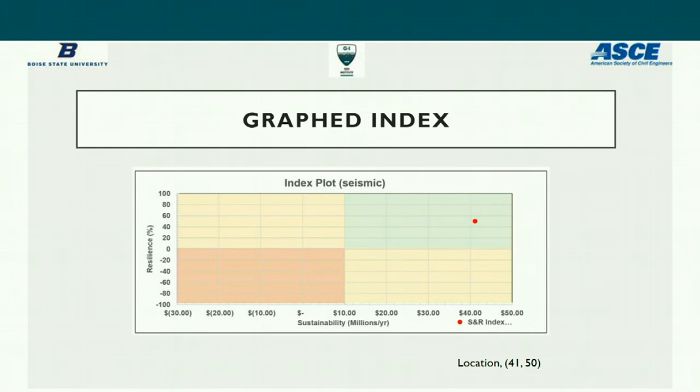Once we plot that, the next step is to be able to plot that information. And when we plot it, we see that this is falling in the green zone, which is very resilient and sustainable infrastructure. But there are several assumptions and drawbacks for this sort of analysis.

Because these are generic input values, the actual construction input could come from on-site inspectors or feasibility studies. So if we had the real numbers, then this analysis would be more realistic. At this point, this analysis is mainly an exemplified one for earthen dam.

And we also used the Bayesian statistics and the Bishop's method of slip slices. Again, there are several other methods to account for these probabilistic failure analyses, and even the failure analysis for the slopes. And also, we didn't account for the spillway, which could be a weak zone in this dam, depending on how the spillway is being maintained and so on.

So I just want to highlight the assumptions that we made, and also the drawbacks because of these assumptions that this analysis has been built on. So in conclusion,

We basically covered the importance of having a unified system for assessing sustainability and resiliency, and accounting for the risk as an important aspect as well. And I provided an example, and also the future steps are to be able to start working with

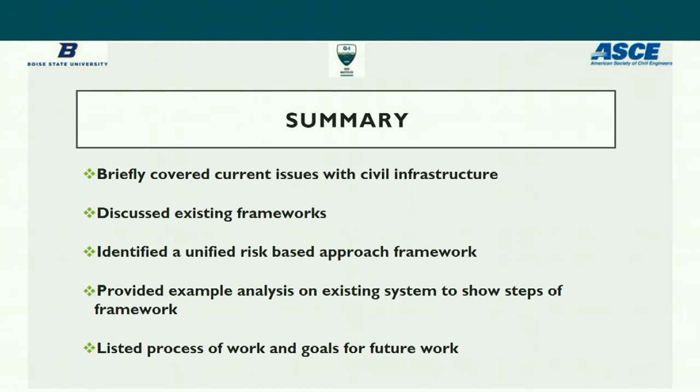But overall, this framework certainly has the ability to account for all these different variables and account for them in a manner that can be visualized, to see which alternative is going to fall in what range within this sustainability and resiliency Cartesian plot. With that, I will see if there are any questions that came about.

As expected, there were none.

But one question I think that can come from this analysis is the same similar question that I have been asking the other presenters as well: so what is the future? Like I said, the future is to make this framework more usable by practitioners and make it more practical. That's our goal towards this unified system.